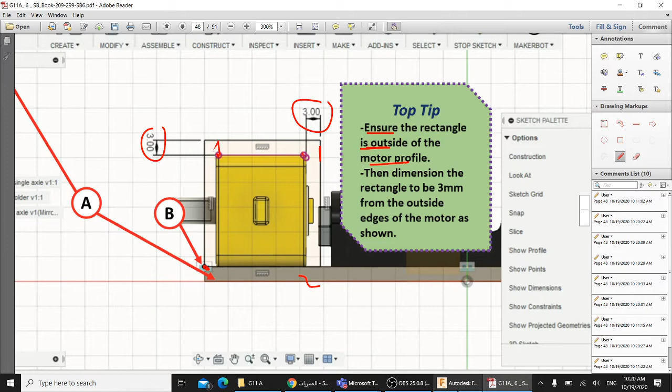It should start from the edge, and the distance from this point to here should be 3 millimeters, and the distance from this point to this line is also 3 millimeters. So we are ensuring that the rectangle is outside the motor profile. Okay, fine. We will be working on this motor, so I will create a sketch, as you can see, on

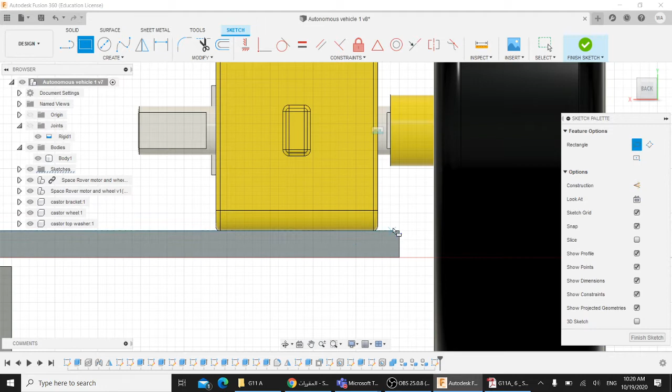this face. Okay, and then I can create a rectangle, a 2-point rectangle, you can hide the joint if you want, from this point up to, maybe I will just draw it randomly at first, up to this point, and then press ESC on the keyboard. Okay, so you have your rectangle.

Now we need to control the dimensions, as you can see over here. So the dimension from this point to this point should be, I don't know why it's going over here, but as you can see it's shown here. Just make it 3 and click enter. Okay, and the dimension again from here to here should be also 3.

So I would adjust the distance from this point. It's already 3, as you can see, so you can ignore that. Okay, or if it is not 3, you should move the motor to be 3 millimeters away. And again, let me go to the sketch dimension. The distance from this point to this point should be exactly 3.

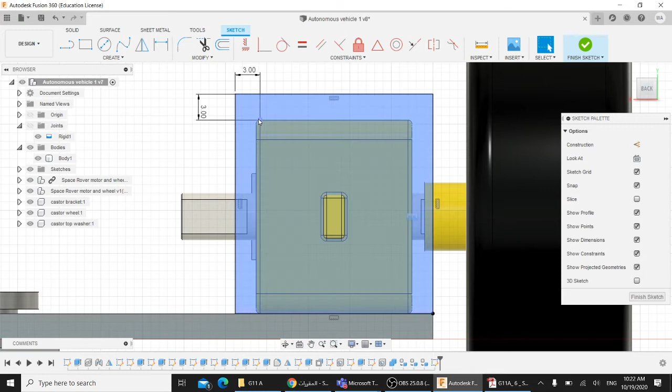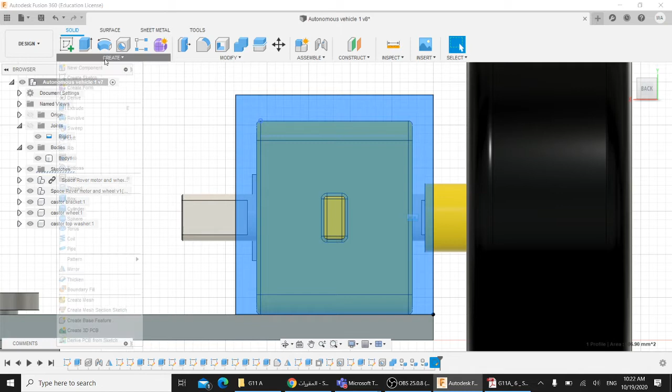Okay, so I have the distance from here to this point is 3 millimeters, as you can see, and the distance from this line to this line is also 3. Okay, so I will finish the sketch. The next step is to extrude. So I would select this profile, this rectangle that I have sketched, and I will go to create extrude.

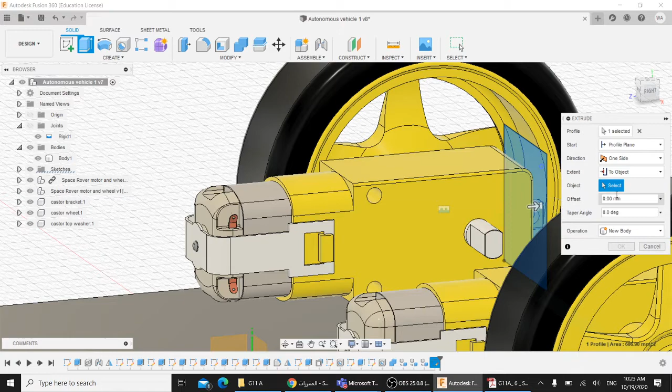Okay, so I did select this one, as you can see, and I will extrude it. So I want to extrude the surface until when exactly? Where? To a distance? The extent I will make it to object, and I will make it extrude to which object? To this surface over here.

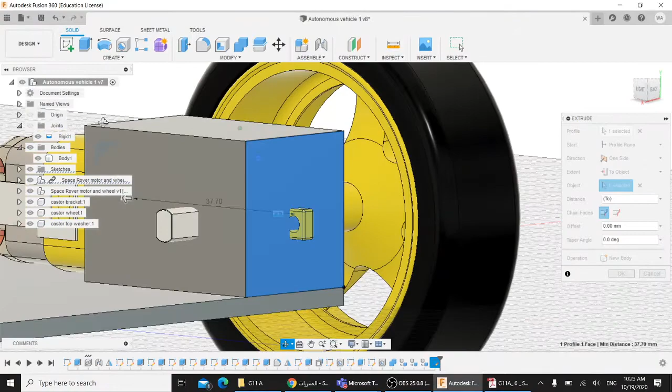I will zoom in and I will select this one, and I will make sure I want to create a new body. So as you can see, I did select my rectangle and I am extruding the rectangle up to this point, so I would click on OK. Now I have created a new body, as you can see here.

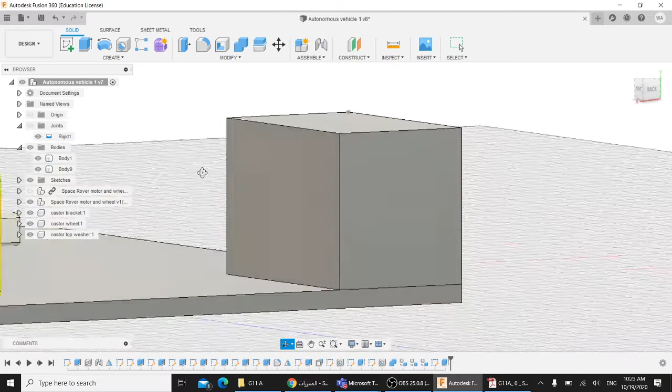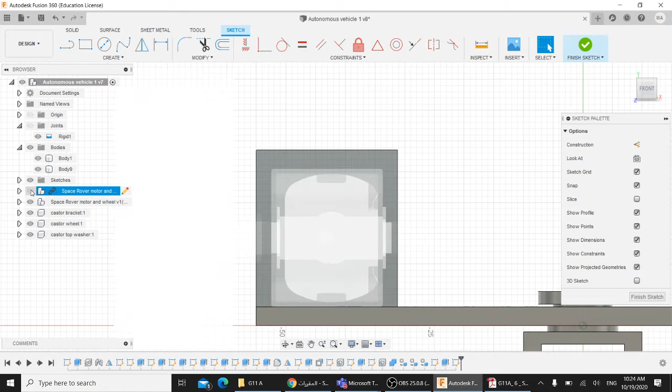If I hide my motor, I can see that I did create a rectangle that is not empty from here. So I want to create a space so that I can insert the motor inside. So I would create a sketch on this surface. Okay, now I need to show my motor. This is my motor, as you can see.

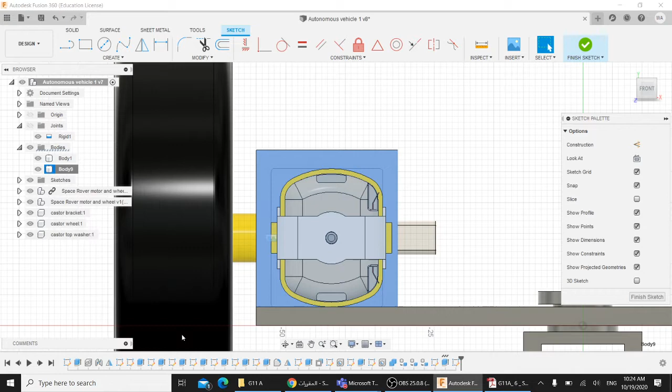And this body that I have created, the rectangular body, I will right click on it and make it a little bit transparent. Control the opacity over here, make it maybe 50%, so that you can notice your motor.

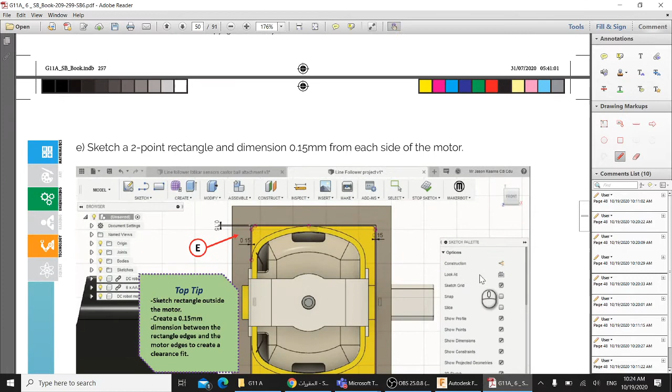Okay, in the book you will realize that we did make the extrude the same way he asked us. Then we created a sketch on this face, and we did create a rectangle 0.15 millimeters away from the motor, so that we can create some space so that the motor can fit inside.

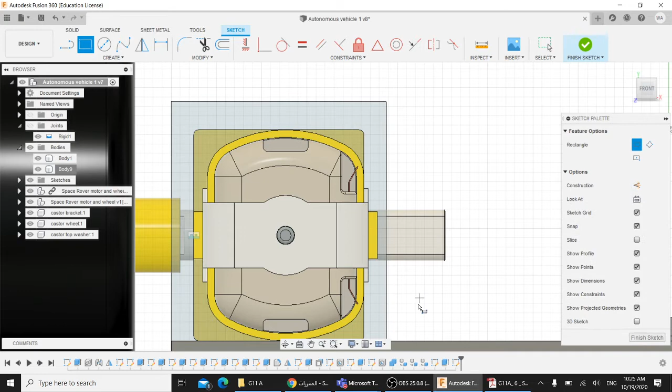Okay, so what I will do, I will create a 2-point rectangle. Start maybe from this point over here, and I want it to go up to maybe here. Okay, this is just random. I will click on ESC. This is my motor. This is my surface. Now I want to control the dimensions again.

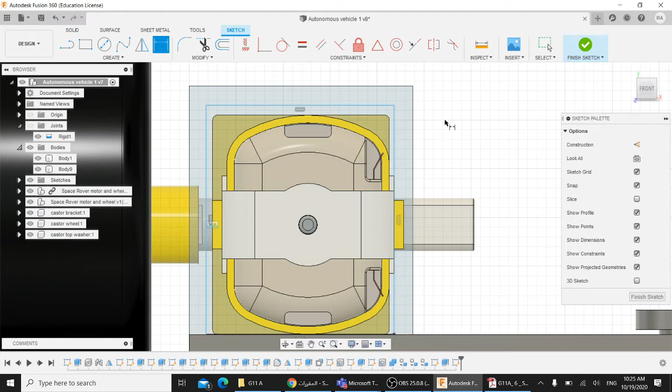So I want to make the distance from this point of the motor to this line of the rectangle again 0.15, as you can see over here. Click on enter, and yes, I have the distance as wished. Then I will make the distance from this one to this point. Drag the mouse, click one time, and make it 0.15.

And again, I want to apply from this point to this point, and drag. Again, make it 0.15. Click on enter.

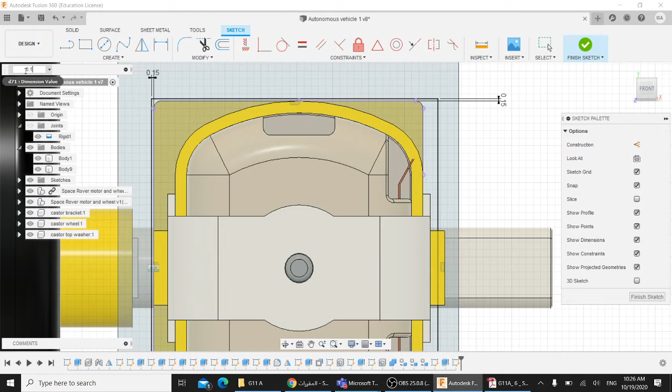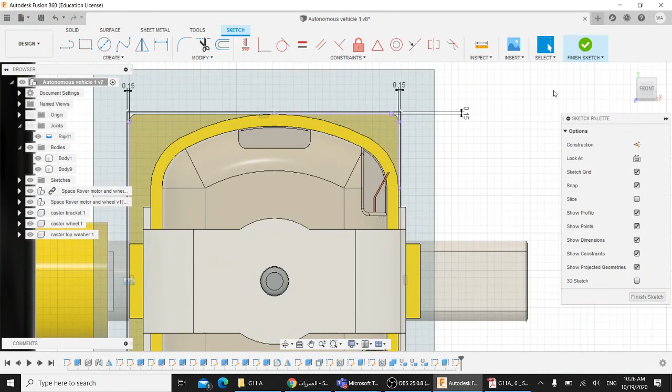Okay, so I believe I have created enough spaces. Click on ESC to get rid of the dimension, and let's see what he asked us to do then. Okay, now click on finish sketch, and then choose the rectangle that you have made.

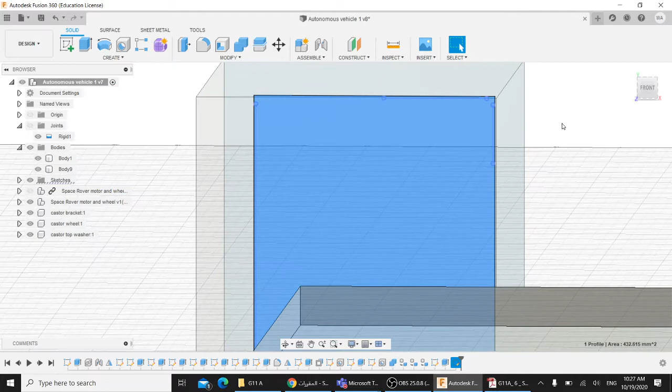Try to hide the motor. Okay, this is the rectangle that I have created, as you can see, when I control the dimensions. Okay, I did select it, which is this one. I want to extrude it, so select extrude over here, or you can find it in create and go to extrude, which is the same.

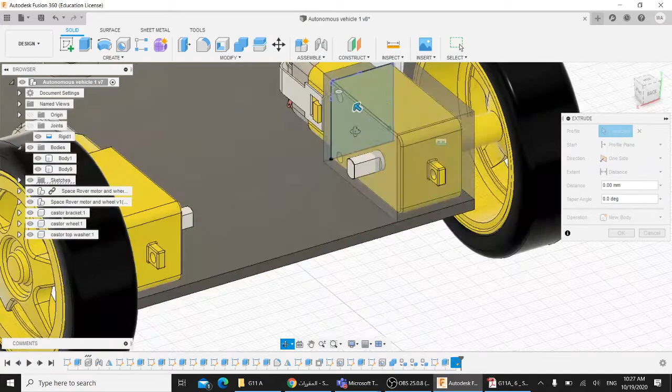I want to show the motor right now, because I did extrude, as you could see. I make the shape transparent so that I can see the motor inside. I want to extend this one to make it to object, because I want to extrude up to an object. But what object? I don't want this surface, as you can see. I want to select the inside surface, this one.

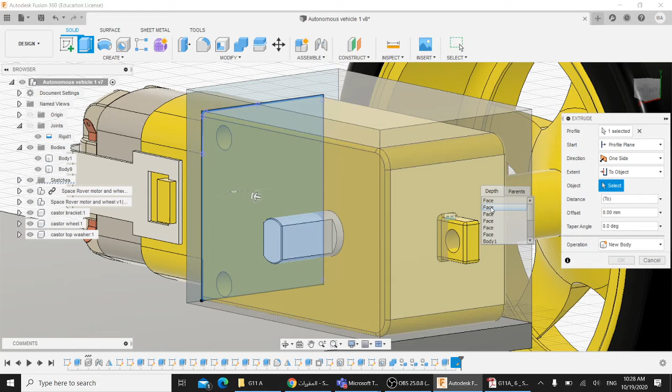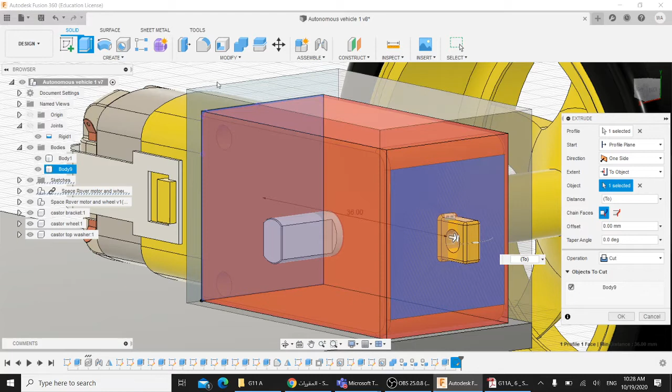then before you finish, make sure that the operation is cut, and pay attention to the objects to cut. If you click on it, make sure that you are only cutting body number 9, which is our box over here. Okay, then you can click on OK.

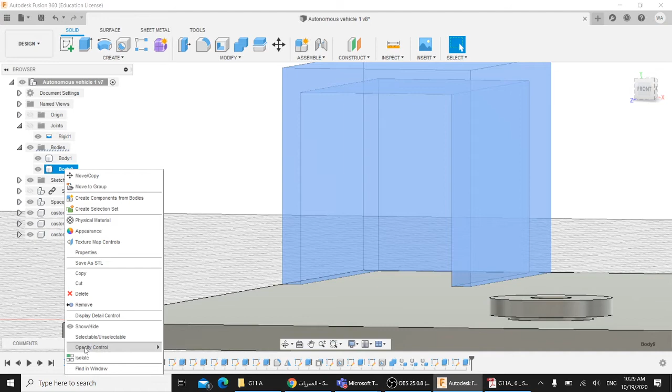If you hide the motor, no, not this one, this motor, you can see that we have created a box that is shell. Okay, you can return the opacity for it. Again, make it 100%, and if you show the motor, you will see that it fits.

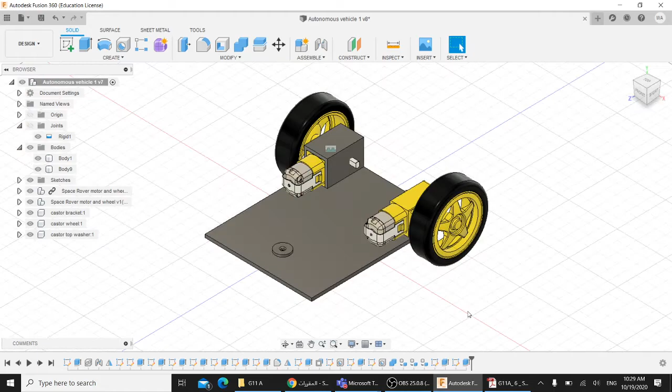But now we need to create, as I told you before, the space to fit this part of the motor, as you can see, and this part over here of the motor. This is what we will do next. Okay, then he told me, expand the sketch tab and select a slot. So we will be sketching a slot. A slot is the same shape as you can see over here, this one.

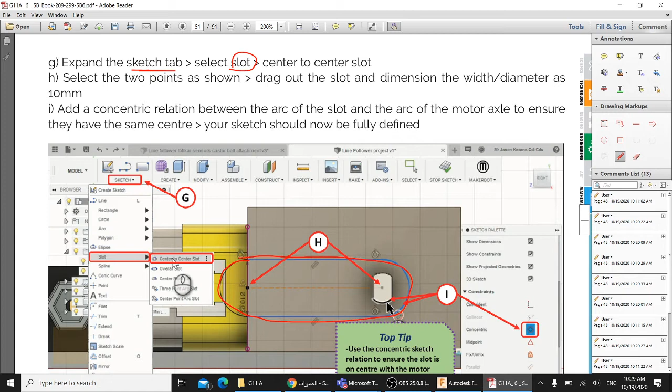Okay, center to center slot, and select 2 points as shown, drag out. So let's see what he has done exactly. I will show you in a moment. So first of all, we will expand the sketch tab, select a slot, and select center to center slot. Okay, so we will go back to our design.

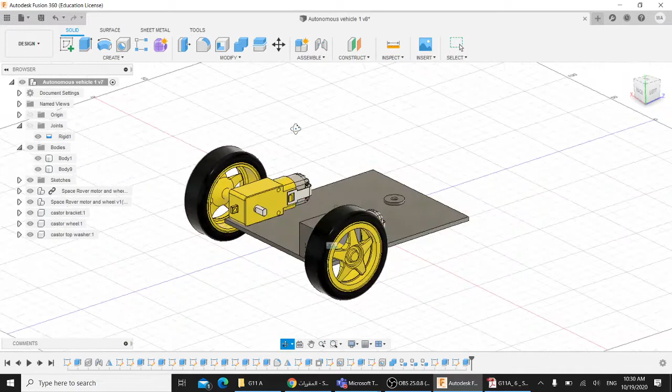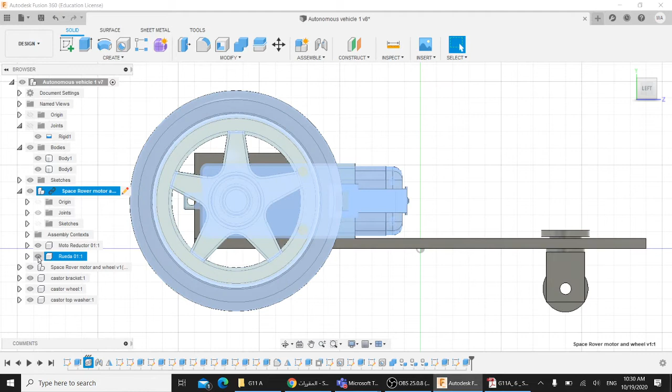As you can see, we need now to hide our motor, or sorry, our wheel. How to hide it? This is our component, all of it. If you expand it, you will see that it contains a motor and a wheel. So you can hide the wheel inside of it. So now we have hidden the wheel, and we can then create a new sketch on this face.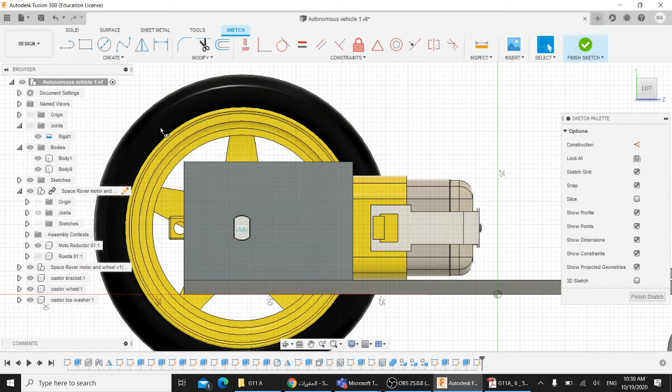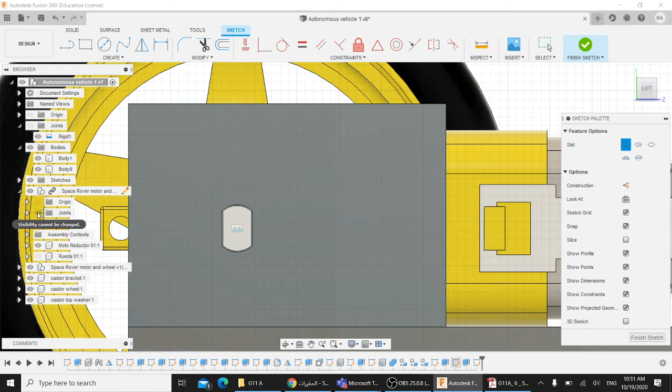And he told me to select a slot and sketch a center to center slot. Then select the 2 points as shown: a point for the center slot over here and a point over here. And I think the dimension of it is 10 millimeters. So in order to draw a center to center, let me hide the joints, all of them actually. I think this one I will hide also. Yeah, I think it's already hidden. Okay, so let's go back.

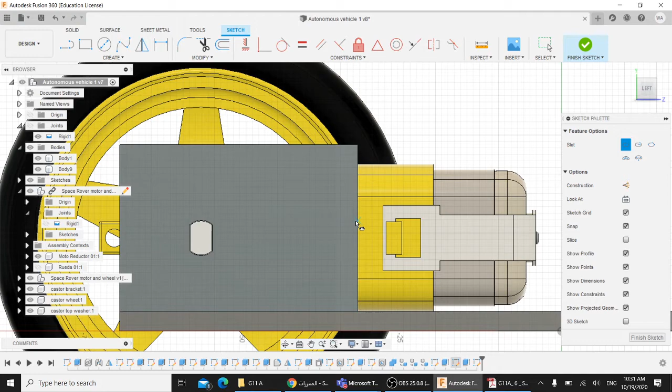So try to select a point on the center of this line. How do you know the center? You can see the mark. When you see a triangle like this, we are at the center of this line. So choose this as a point and choose another point over here. Make sure it is straight. Okay, and make the dimension, not 8, but 10, and click on enter.

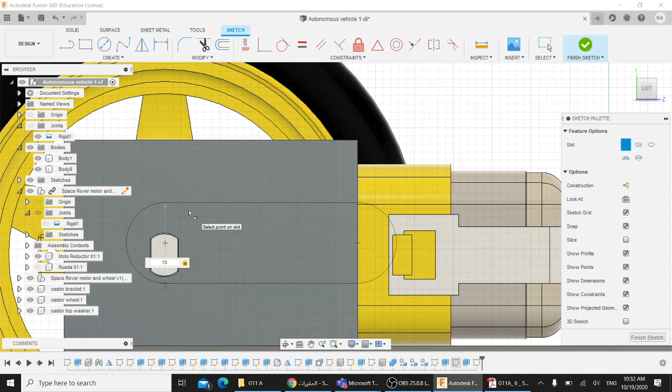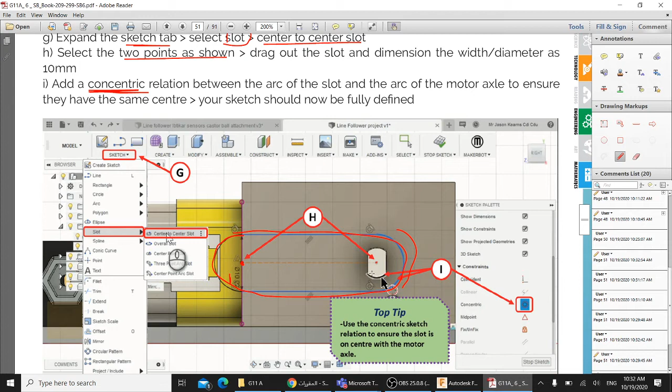Okay, but we can see now that this point is not at the center. We want to make this point centered over here. In the book he told you how to do so. We will choose the concentric relation between the arc of the slot, this one over here, and the arc of the motor, this one. We want to make them have the same center.

How to do so? Over here are our tools for sketching. We look for the concentric. This is the concentric tool. Click on it, click on this arc, and click on this arc.

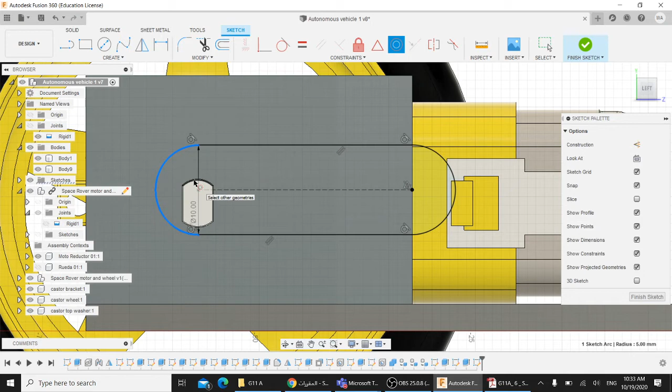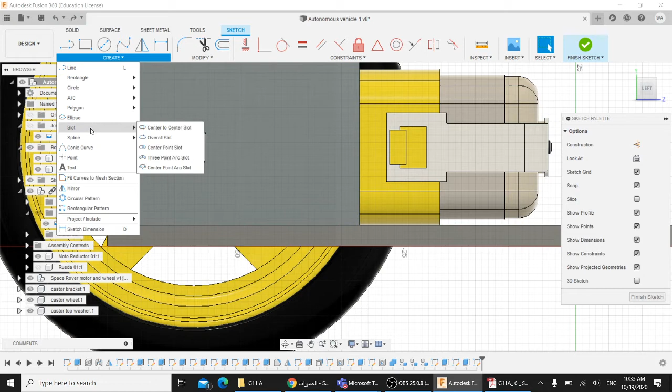Okay, it failed, I think, because we have selected the dimensions. We have maybe selected this one in the center. So what I will do exactly, I will go back, I will undo everything. Let us go again and again create the slots. Okay, center to center slot. Now I will create it from any point, maybe over here up to this line over here.

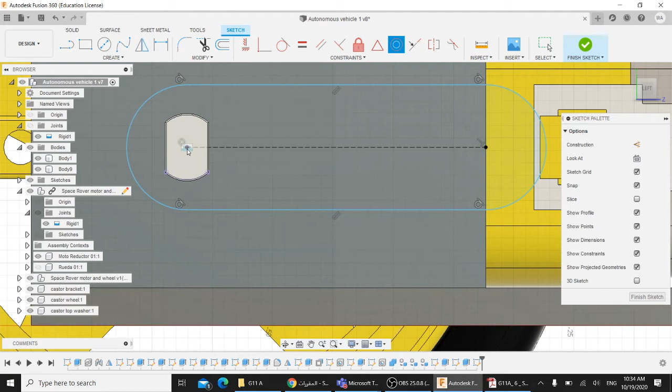Okay, and this is, again, I will make it 10. So I think it should work right now. Press ESC and select the concentric tool. Make sure that this arc and, for example, this arc, okay, as you can see. Now I know that this arc and this one over here have the same center. Okay, so this is exactly the center point of this arc over here.

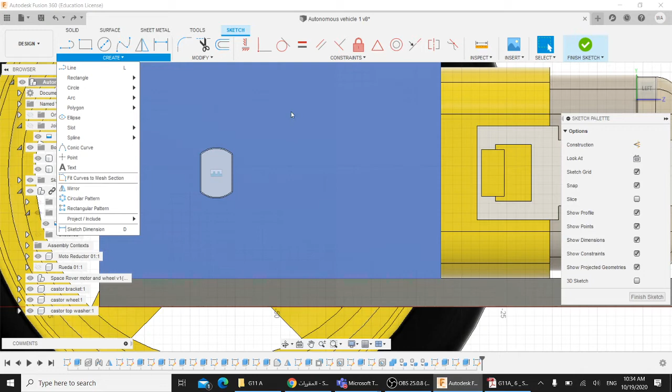Okay, now I know that this dimension also, as he said, is 10. I will redo it again for you just to make sure that we cover it. Again, I did create a sketch on this face, and I did go to slot. I created a center to center slot. I created a point over here, for example, and the other point on this line over here, and the dimension I make it 10.

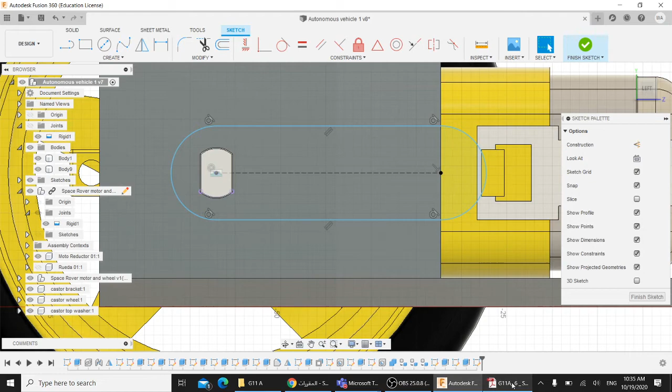Okay, I have created a slot. Press on ESC and go to create sketch dimensions. No, sorry, concentric. Press on this arc over here and this arc, and then they will be concentric. Concentric means they have the same center. So the center is over here, exactly in the middle. Okay, so I have done what he told me.

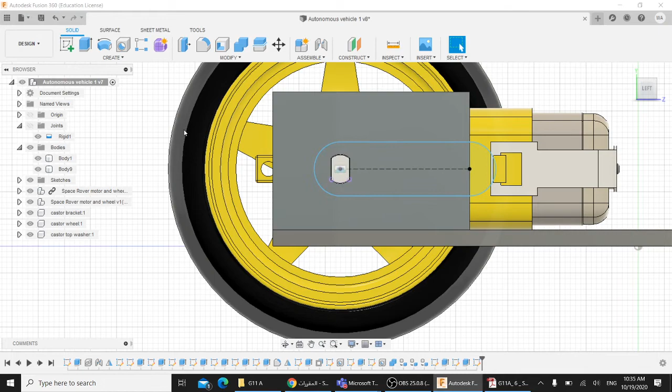Then he told me to select the extrude tool and select the slot as a profile and make the extrude up to the other point. So what does this mean? I will finish my sketch. Let me close this one. Okay, this is my sketch, as you can see. What I want to do exactly is go to extrude. My profile I want to select is this one. This is what I want to extrude, as you have seen over here. And I want to extrude it until this point.

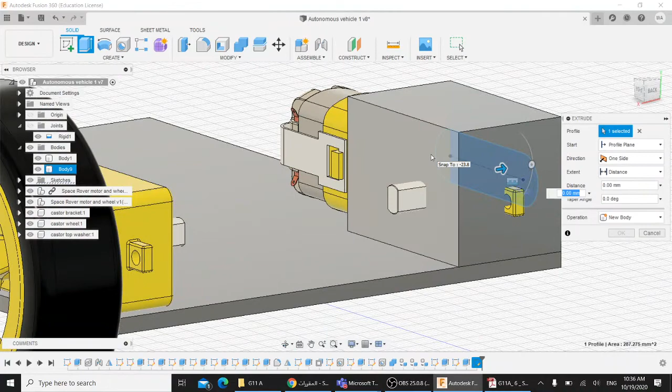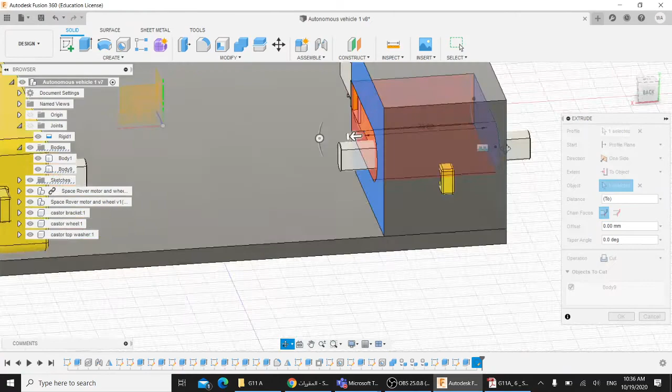How to do so? I will go to extent, make it to object. The object in this case will be this face. Click on it and make sure that the operation is cut, and make sure that you are cutting only body number 9. So you will see now I have extruded from this face up to this face in an operation that is cut. Then click OK. Now we can see that we have created a space for this part to be entered in this mount. Okay, so we have completed this.

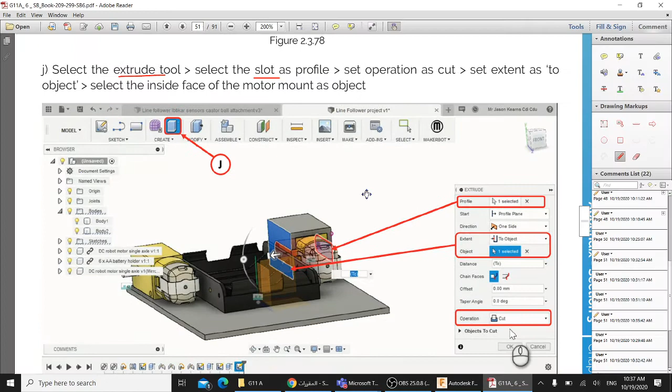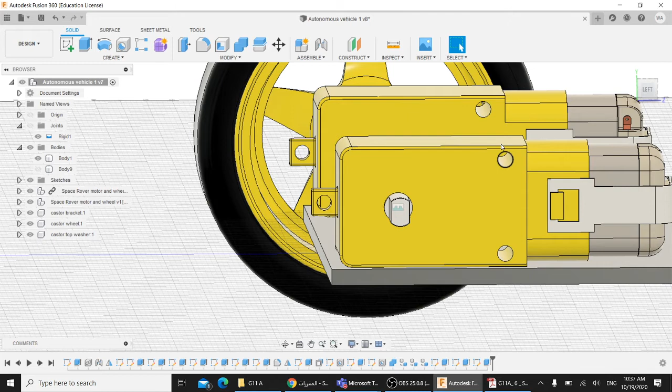Now let me show you the motor by itself. You can see now we have two holes in the motor over here, this hole and this one. These holes are usually used to put a screw inside to fix the motor exactly. So I want to create a hole over here and a hole over here to fix a screw to make the motor exactly fixed inside of the motor mount.

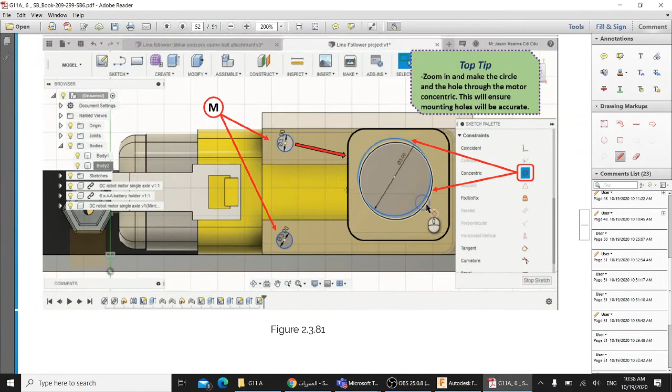Okay, how to do so? First of all, I need to again right click on my body, which is this one, and make it 50% of the opacity control, which is like 50% transparent. As you can see, it asks you to do so in the book also. Okay, then he told me to sketch two center circles as shown and make them concentric with the circle available, and he told me to make it 3 millimeter. Okay, let's see how to do it.

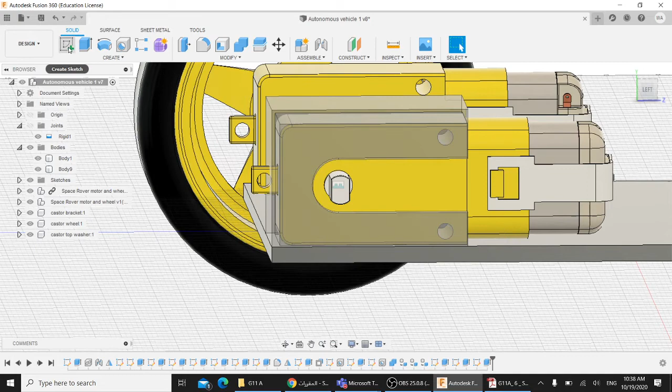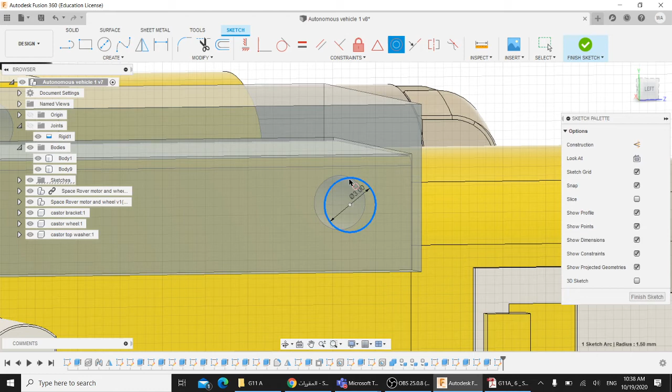What I will do exactly is that I will create a sketch on this face of this body. Okay, and then I will create a circle, a center circle. I will create any circle over here, maybe with a 3 millimeter. How to make sure that they have the same center? Okay, I will click on concentric. I will select my circle and I want to select that circle. I will keep pressing on the left click,

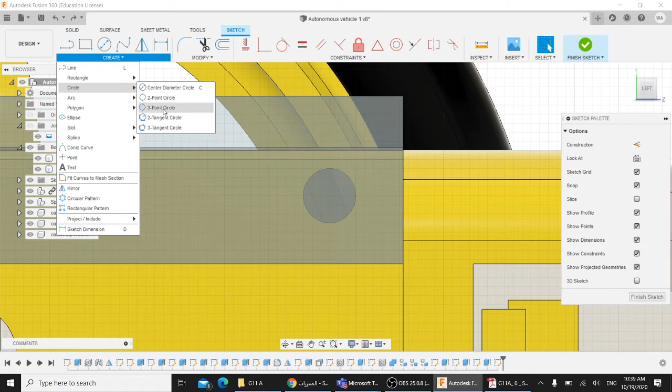or you know what, I will tell you another way, a much better way. We were sketching. I don't want you to create a center circle. Create a 3-point circle. So the points, try to select them at the edge. So I have, for example, over here 1 point and another point and another point at the edge, and make it 3.

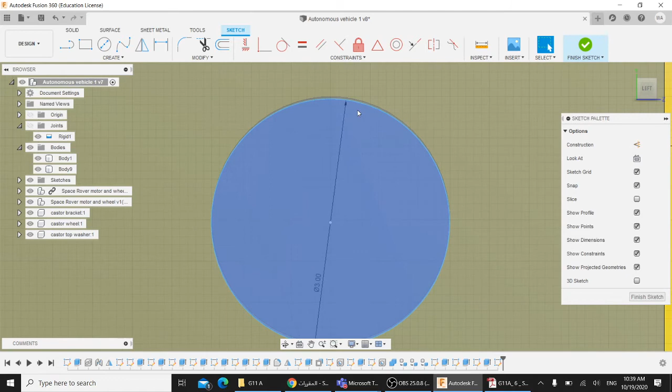See, now I can see that I almost created a center circle. Let me see if I can make them concentric. I can choose this one and this one. So now they have exactly the same center, and this is with 3 millimeter. So let us see again how to do it.

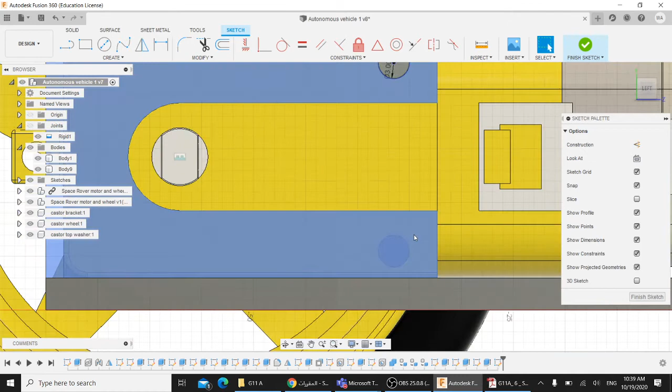I will show you now using the center circle. In fact, I will create a circle, a center diameter circle. I will create a circle maybe over here. I will make it 3 millimeter and click on enter. So I know that this is a 3 millimeter.

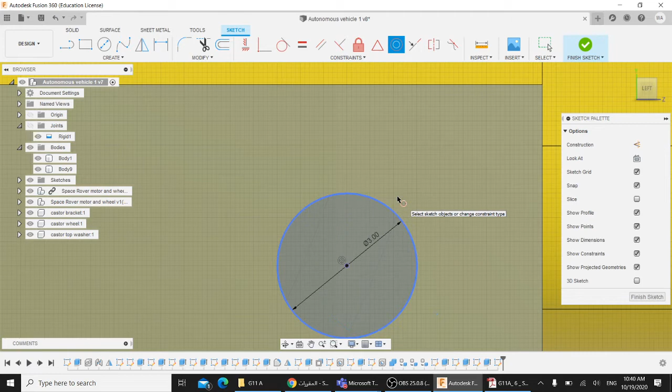What to do now? Click on concentric, choose this circle over here, then click on this circle over here, and now they have exactly the same center. I think this way is much better. Try to do this way. Okay, now I think you know what to do.

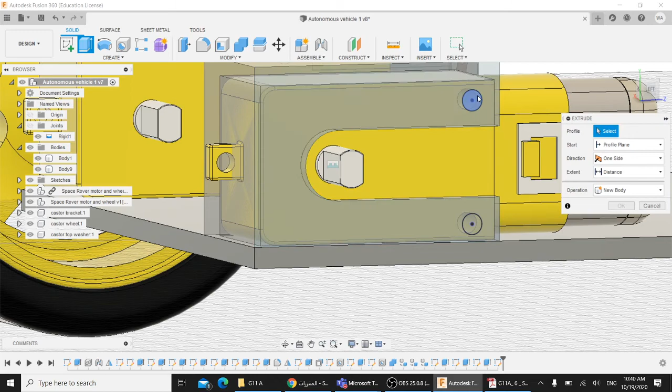We will finish the sketch and we will select these two circles. In fact, I will extrude this circle and this circle. I will extrude them, make the extent to object, and I will make them extrude up to this point. See, I will make sure the operation is cut, and I will make sure that I'm extruding only body 9 and click OK.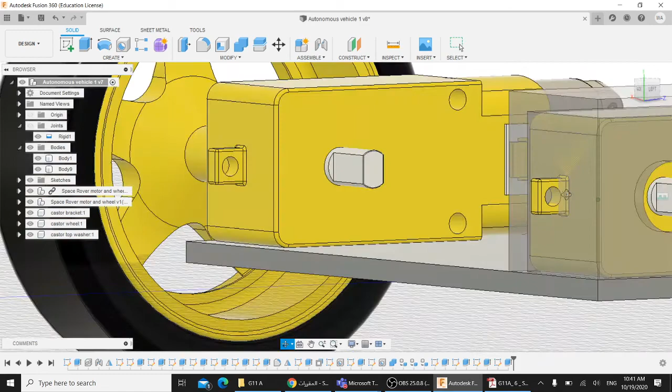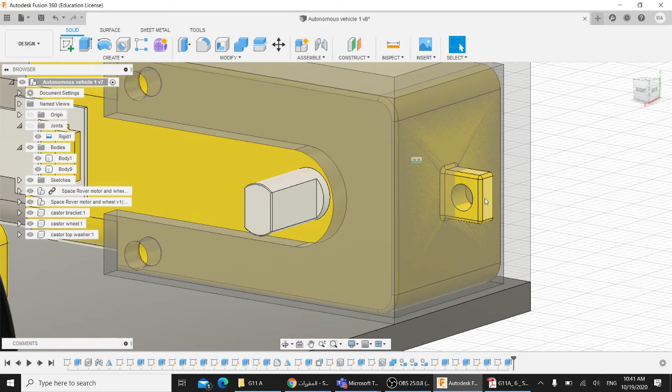As you can see, the last thing to do now is to create a hole for this one. So what I advise you to do is, because as you can see this part is excessive, there is no hole over here so that I put this part of the motor, so I need to create a hole. So what I need to do for now is to create a sketch on this face, okay, and create a center circle.

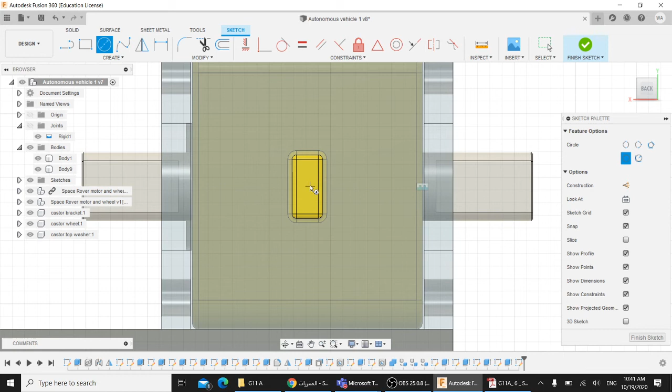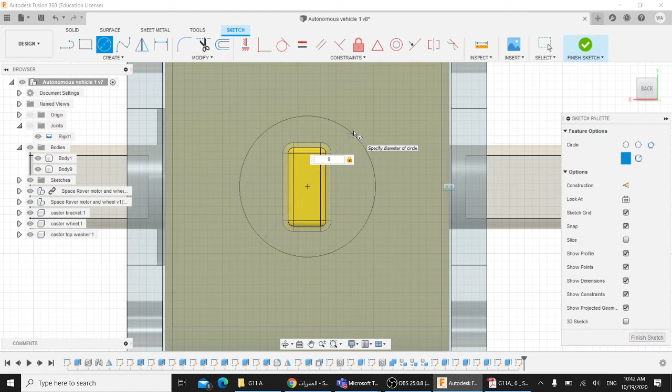For example, try to make it approximately at the middle. For example, let's say over here, okay, and make it bigger, make it bigger than this part over here, be outside. So for example, I think 9 millimeter is acceptable. Okay, so 9 millimeter of diameter. Okay, and then what we want to do is to finish the sketch. So this is my circle that I have drawn.

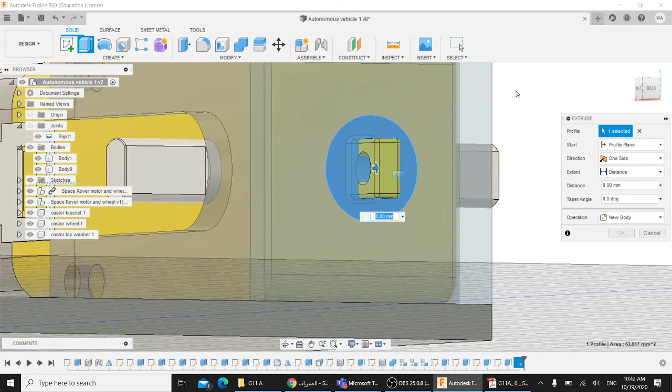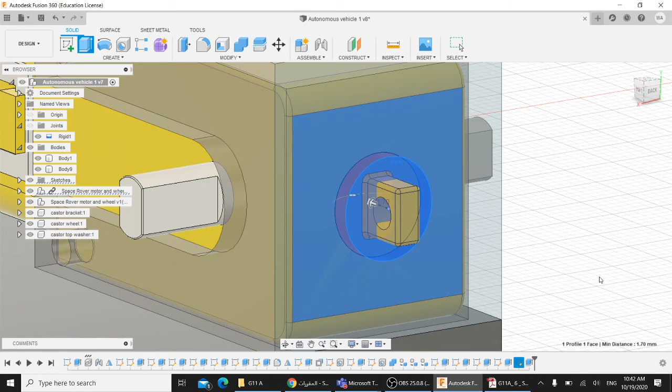Select extrude. I want to extrude this circle up to where exactly? Up to this face. So extend to object. The object is how to select the motor. Keep clicking the left click and select the second face, which is, as you can see, this one, and make sure that the operation is cut, and make sure that you are cutting only body 9 and click OK. So now I have a space to insert this part of the motor.

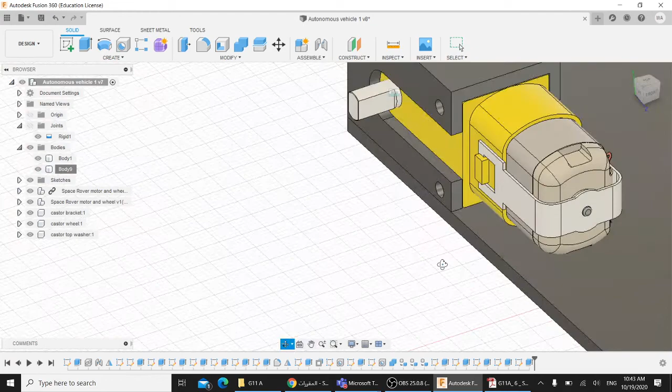See, if I return the opacity control to 100%, I can see that I have successfully created a place where the motor can fit, and I can mount it with the screw over here. It can be fixed. The final step, as you would guess, is to create the same body over here also. So this is pretty simple.

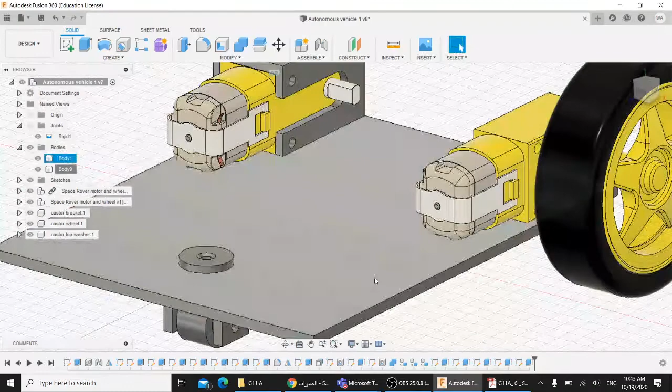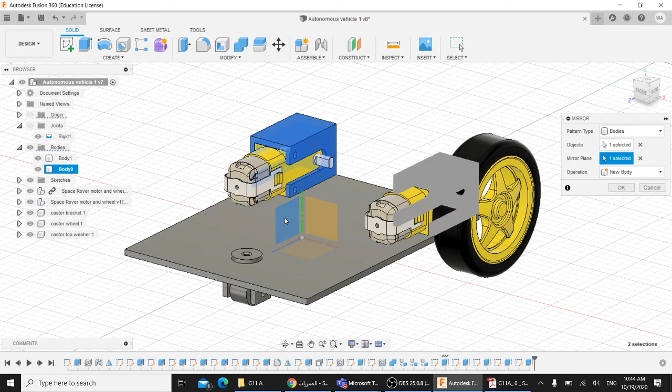This is my body that I have created. I would go to modify. I want to create a mirror. I want to mirror what exactly? The pattern type is a body, because this is my body that I want to mirror. So which object to mirror? I will select this body over here, and I want to mirror it around the YZ plane, and the operation, of course, will be new body, as you can see. So I have successfully created two mounts.

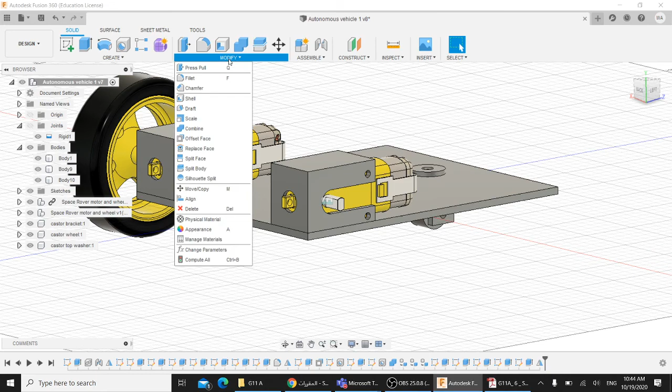The last step to do now, of course, I want to make the chassis over here and these two mounts to be as one body. So I want to go to modify and combine them. So the target body in this case is my chassis, and the tool bodies that I want to combine with are the two mounts, this one and this one, and the operation of course will be join. So now I have them as one body.

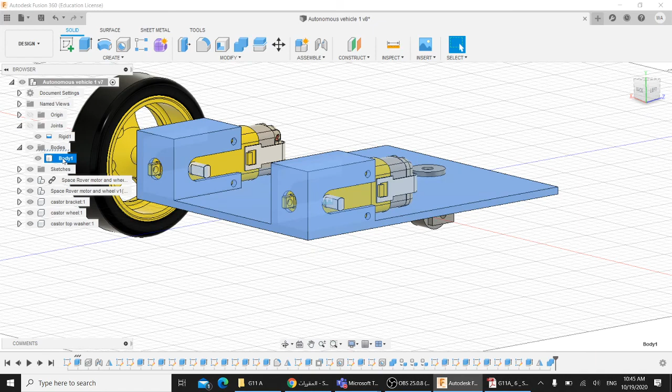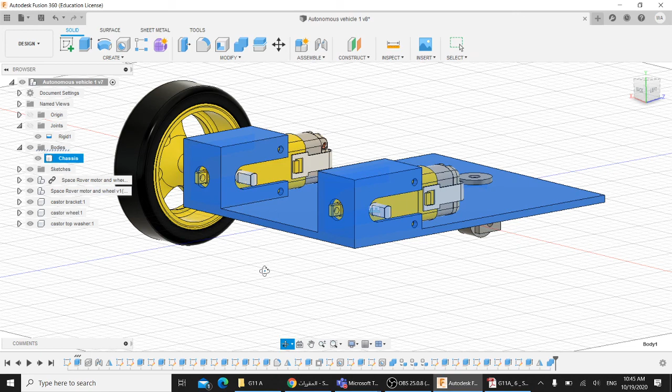By the way, if you check your browser over here under bodies, you can click on the body, click again, and you can rename it to be, for example, chassis, and click on enter. So you have your body named as chassis. And again, I have my castor wheel over here as a component. You remember this from last lectures. I have made them as components, not bodies.

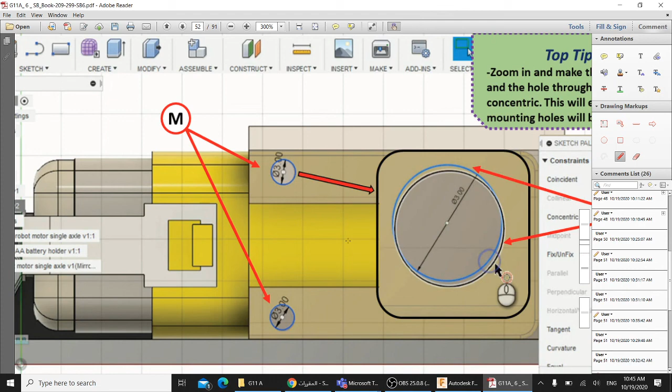And in this case, I would have exactly finished the mounts. The same operation, I believe, was done in the book. You can check the book for any difficulties you face. He did mirror them. He did do some other operations.